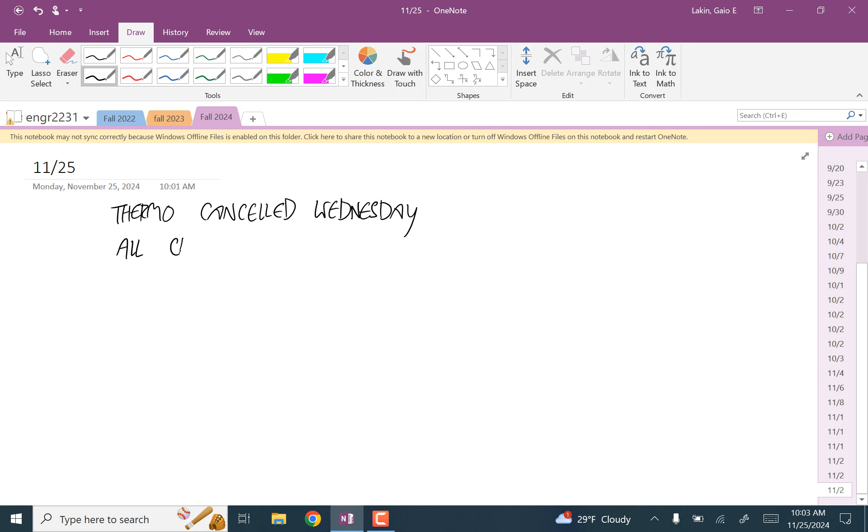Okay, but that's not what I meant to start by saying. The first thing is there's no class. My class on Wednesday is canceled, so Thermo is canceled Wednesday. All classes are canceled Thursday through the weekend.

I don't know about the status of the building. If you're going to drive in, you should find out about that. My guess is for sure on Thursday the building is closed, and I think it'll probably be closed Friday too.

And then the withdraw deadline - I'm not saying this for anybody in here right now, everybody in here is in good shape, but to get this on video, the withdraw deadline is this Wednesday. So after this Wednesday, that's not an option anymore.

Think about it. And if you're considering withdrawing from the class, it's a good idea to make an appointment with an advisor first, because it can have implications for financial aid and stuff. Some financial aid it matters for, some it doesn't. Just talk to somebody who knows about that stuff and make an appointment with an advisor.

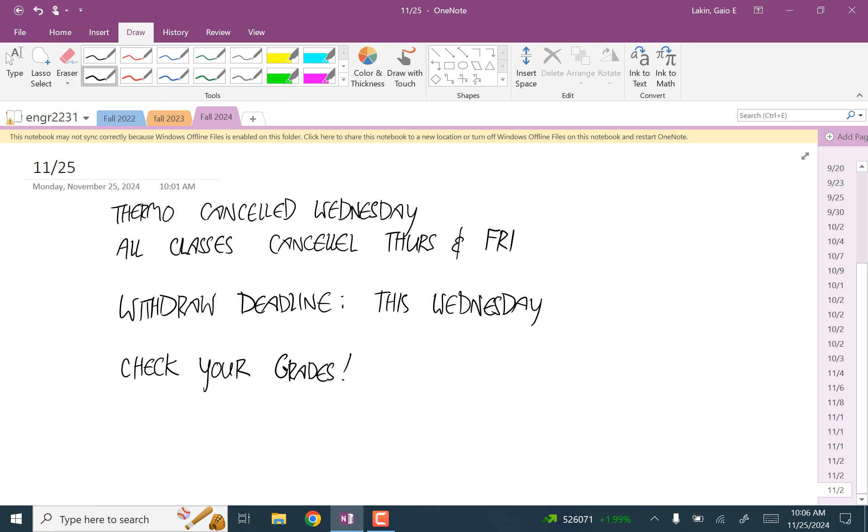All right, the next thing I want to do - I don't think I gave you any daily assignment, right? Okay, so I just want to do an example that's a lot like the daily problems you're going to be assigned. This is an example of using values with the Rankine cycle to calculate stuff.

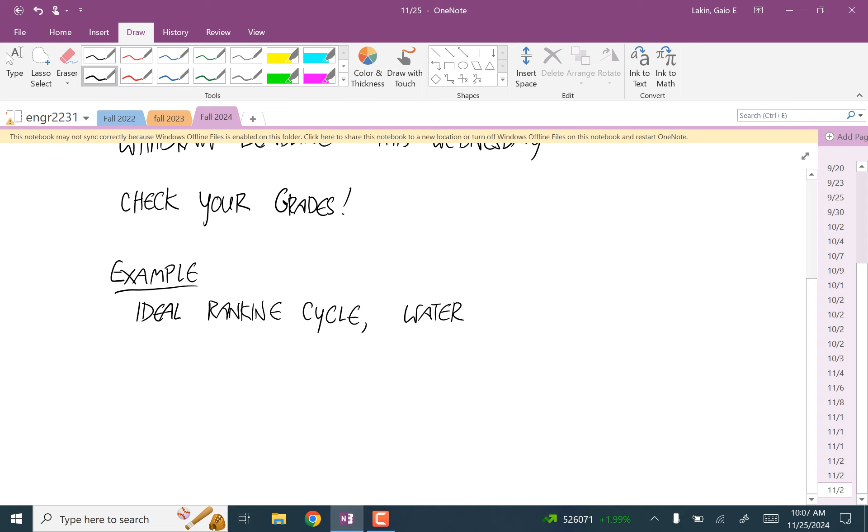The Rankine cycle that we've been dealing with so far has only been the ideal cycle, so this is an ideal Rankine cycle where water is the working fluid. We know that saturated vapor enters the turbine with a pressure of 8 megapascals, 8.0 MPa.

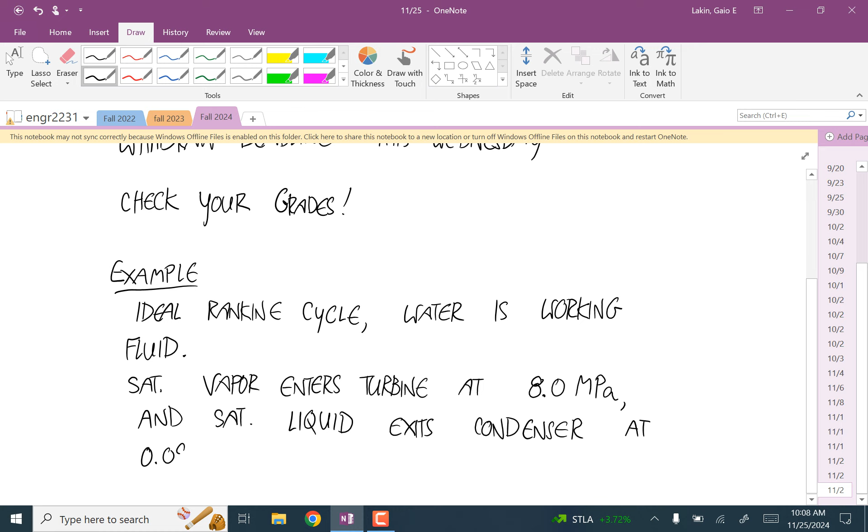And saturated liquid exits the condenser at 0.08 megapascals. And we're told that the net power of this plant, the net power output, is 100 megawatts.

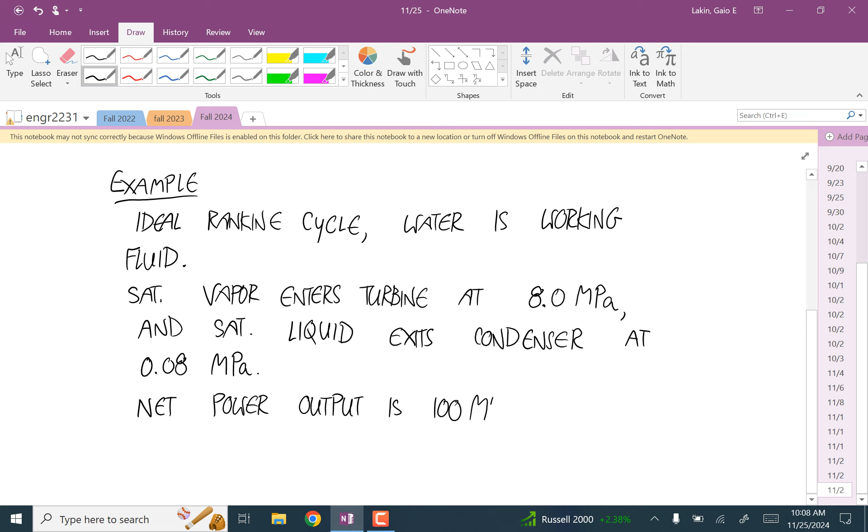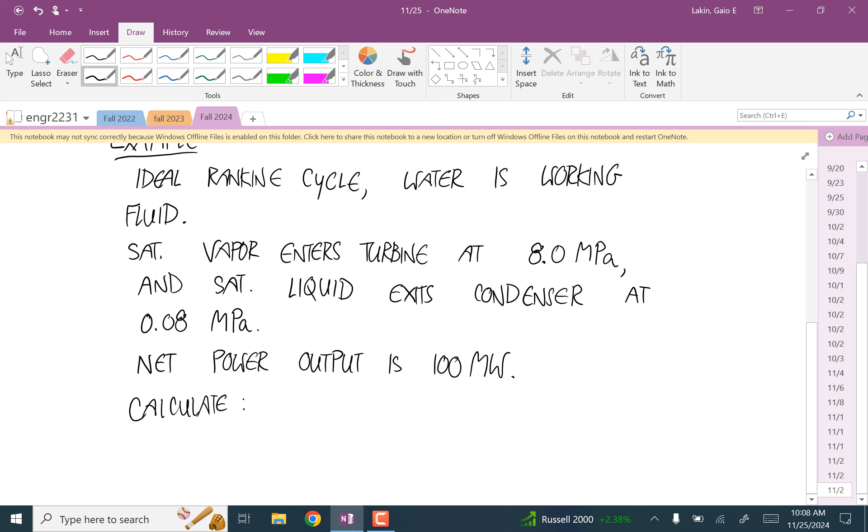And we want to calculate the efficiency and compare it to the ideal efficiency - oh, that doesn't make any sense, this is ideal, right? Yeah, very good. So we just want to calculate that efficiency, which is the ideal efficiency.

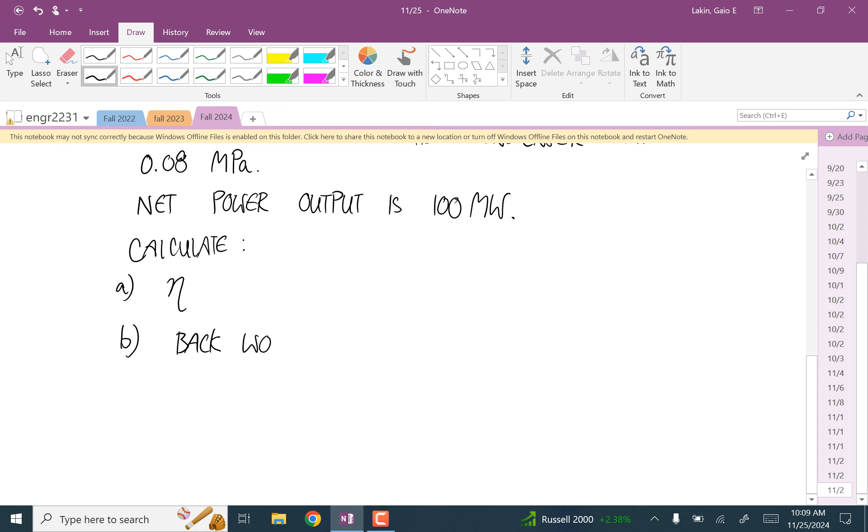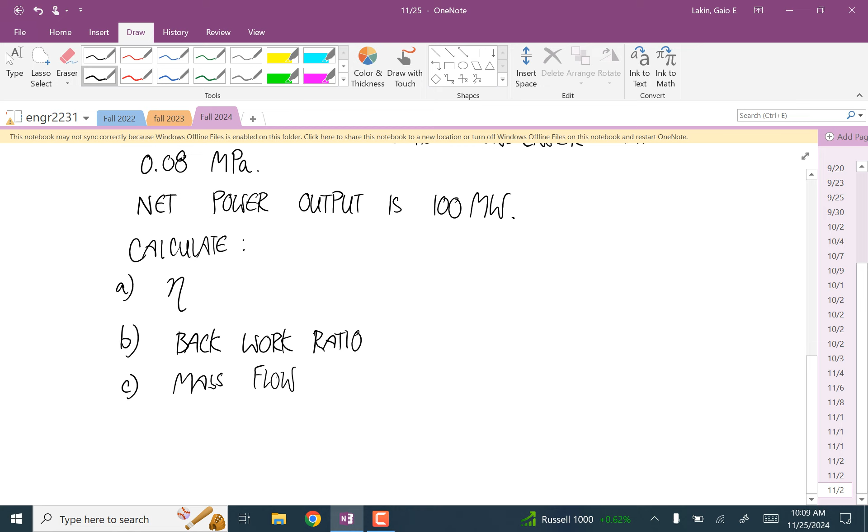We want to calculate the back work ratio. We want to calculate the mass flow rate. We want to calculate the heat transfer into the working fluid at the boiler, the heat transfer out of the working fluid at the condenser. And then last, I'll go into some detail about how to do this calculation because I haven't done this yet, but you'll see this in a problem or two.

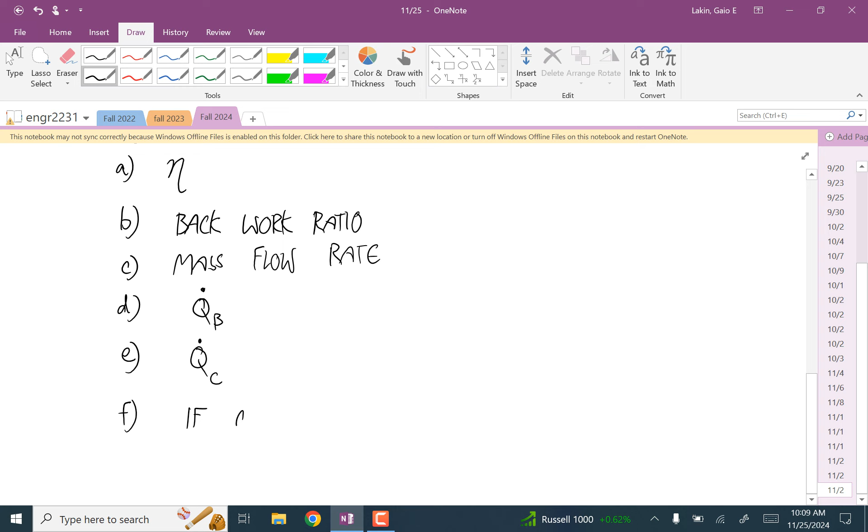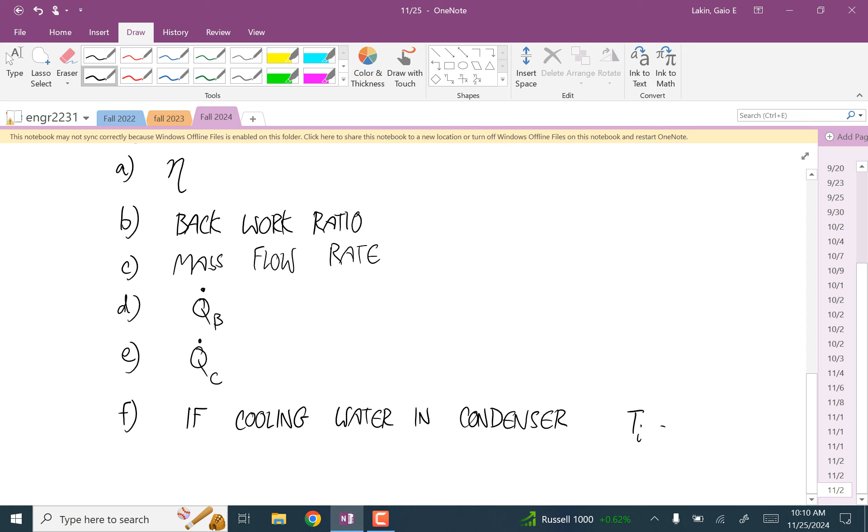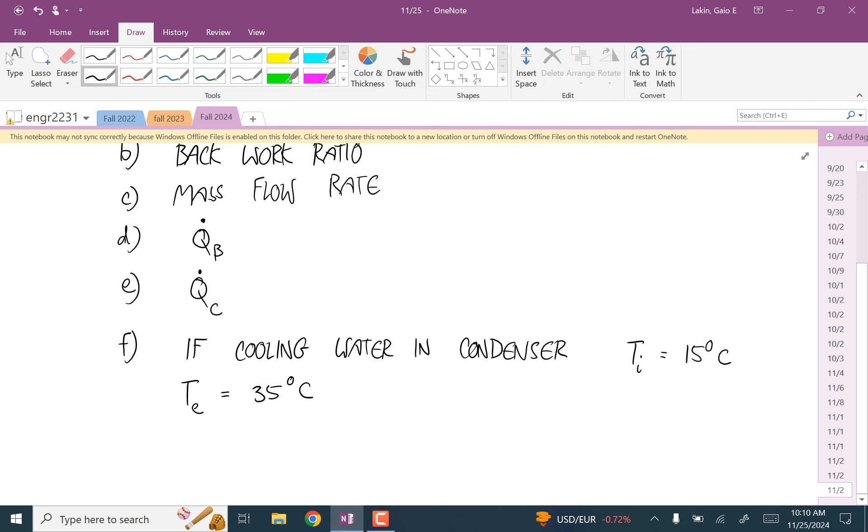If the cooling water in the condenser has an inlet temperature of 15 degrees Celsius and an exit temperature of 35 degrees Celsius - this is the water that's sent through the walls of the condenser to carry away the heat from the working fluid - the question is, what's the mass flow rate of the cooling water?

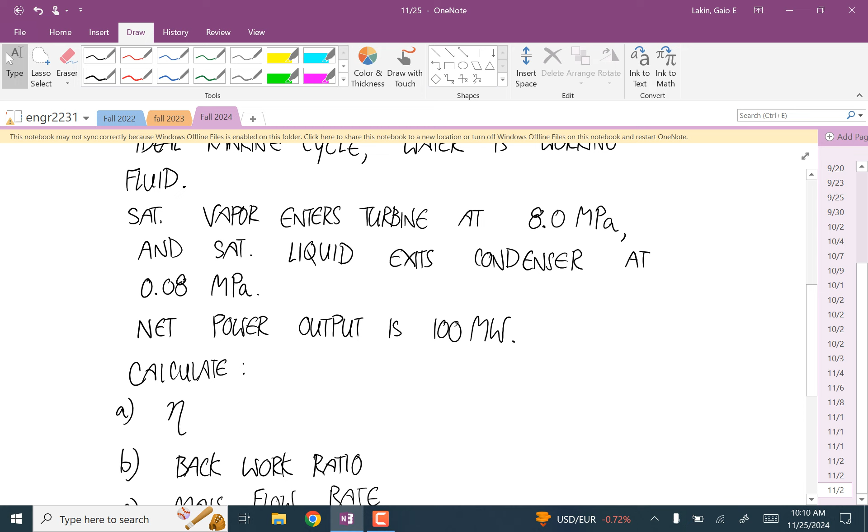The first thing I want you to notice about questions like this is you look at this thing with 4 different stages where we have all these enthalpies in our calculations, and you're like, there's no way that's enough information to calculate all this stuff. But remember that in the Rankine cycle, for every process, some property at the start is the same as at the end, because we have the 2 isentropic processes and the 2 isobaric processes. So if you can calculate one pressure, you can use that pressure in a different state, and if you can calculate one entropy, you can use that entropy in a different state.

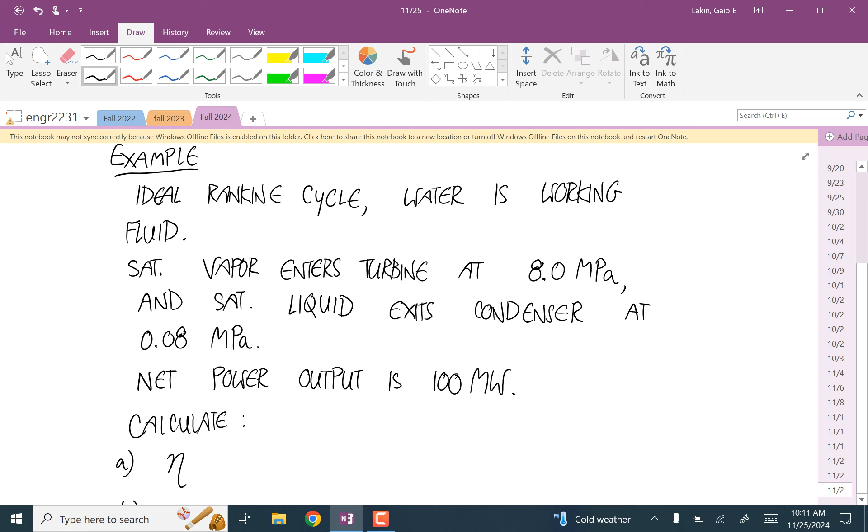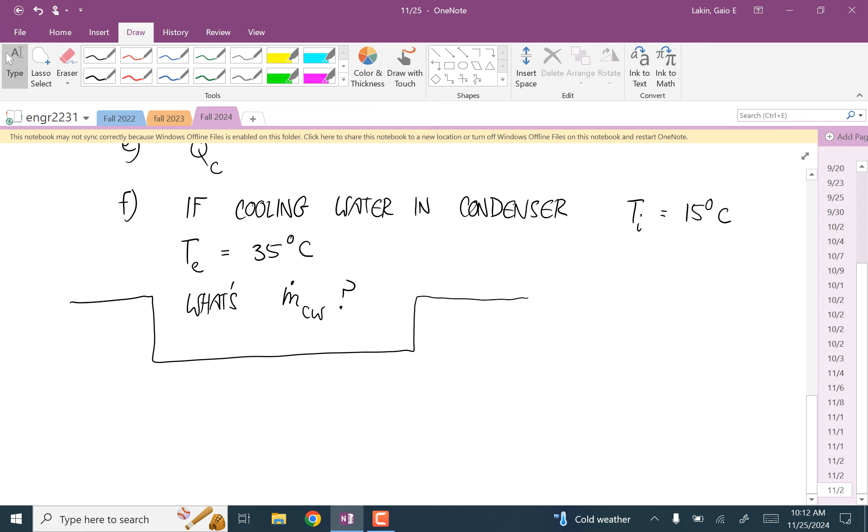Okay, so it always is going to look like you don't have enough information. But what we're going to do is just write down what we know, and we're going to start working our way around saying, okay, well, I know this is equal to this is equal to this. It's like one of those logic things in a standardized test.

I'm going to start by drawing the vapor dome in the temperature entropy diagram. Here's our state 1. Here's our state 2. State 3. State 4.

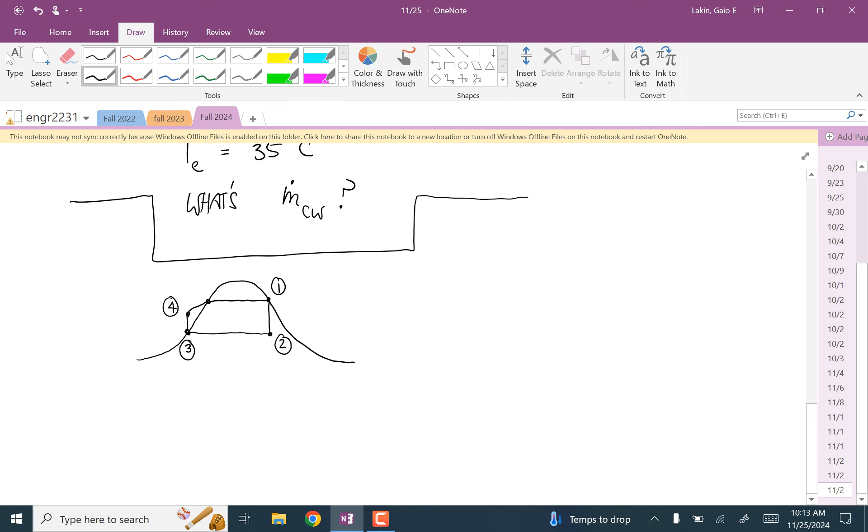Notice that for states 1 and 3, all we need to know is a single property in order to define every other property, because those are on saturation. At state 2, we also only need one property, but we would also have to know the quality, because this is a mixture. And for state 4, from the process from state 3 to state 4, we can assume that this is incompressible, because that's a liquid. It goes from being a saturated liquid to a compressed liquid. So those are all tools that we have available.

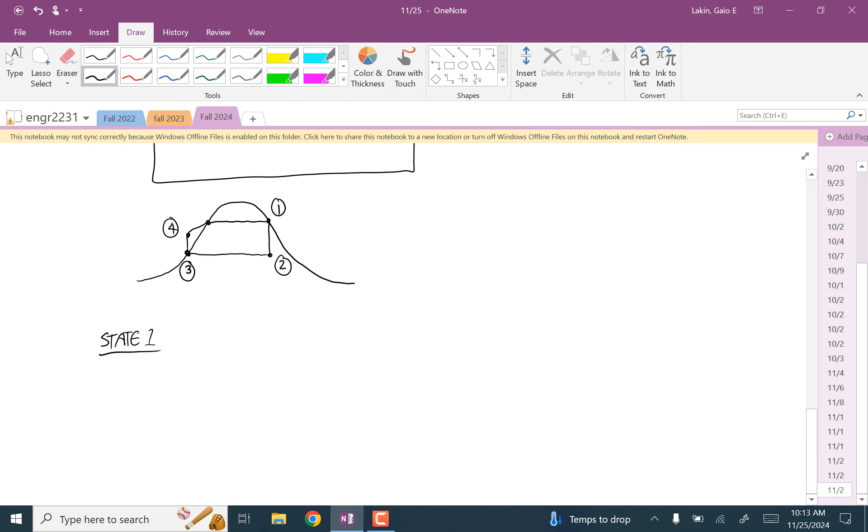All right, so I'm going to write out state 1, state 2, state 3, and state 4.

One to 2, what's that process? We can all agree it starts with iso, something. Isentropic, yes. That's the turbine. The two that are constant pressure are the ones where they're just heat exchangers. Think of it as a big room where you're putting this stuff in and you just have heated or cooled walls. So that's why it's constant pressure. So isentropic is the turbine and the pump. This is the turbine.

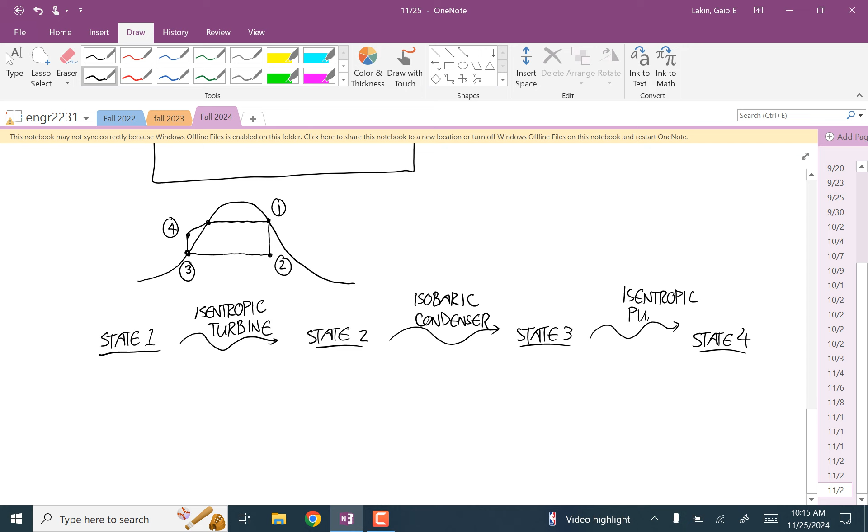2 to 3, what's that? That's the isobaric condenser. Yep, exactly. And then 3 to 4. Pump. Yep, isentropic pump. Boil it again. Yep, and then 4 goes back to the other side, and this is the isobaric boiler.

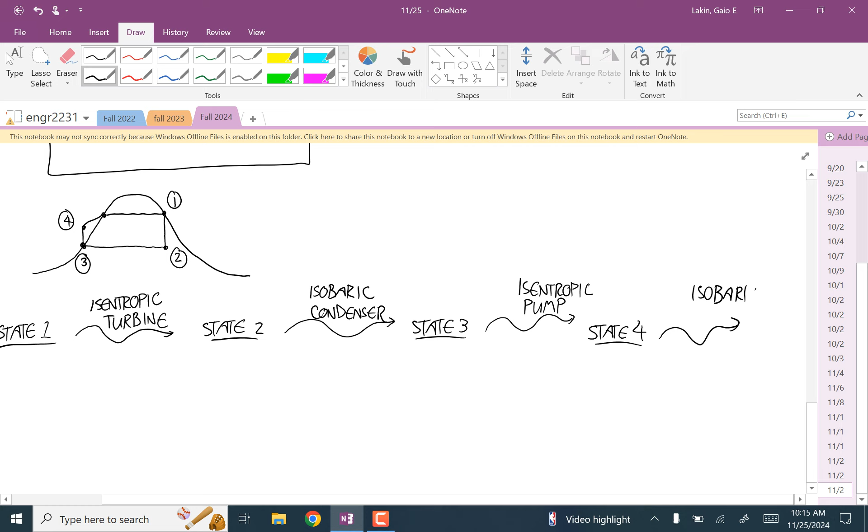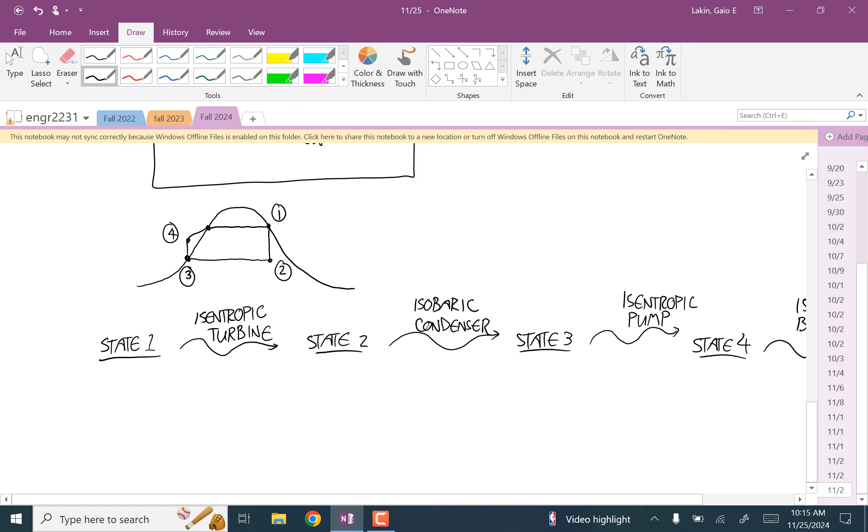Okay, so we know that state 1 and state 2 have the same entropy. Doesn't the pressure change though? It changes going from 3 to 4, but it doesn't change from 4 to 4. Oh, 4 to 1, no, it doesn't change. It's the same pressure — think of it as just one big room. The pump is just dumping stuff into this room, so the pressure of everything is the same inside this room.

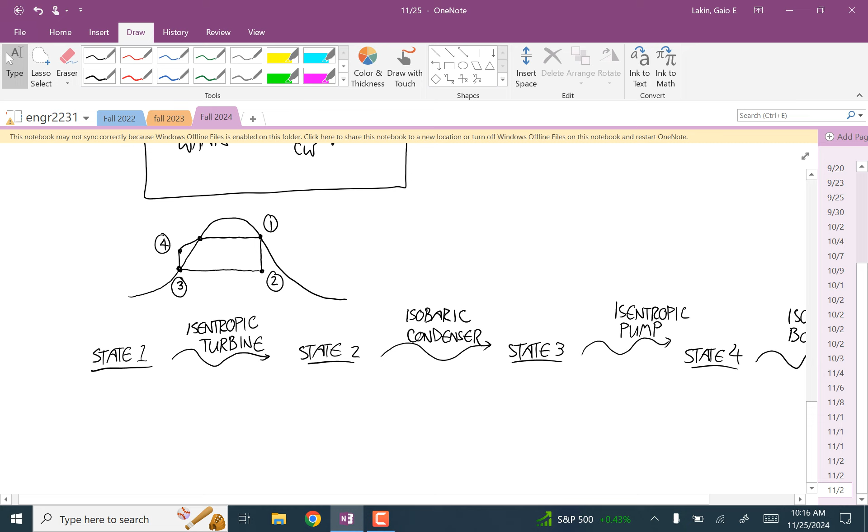Is it because it's a liquid? Not necessarily, because the condenser has vapor in it. It's just because it's all in contact with each other, so the pressure is just always equilibrating in both of those two cases.

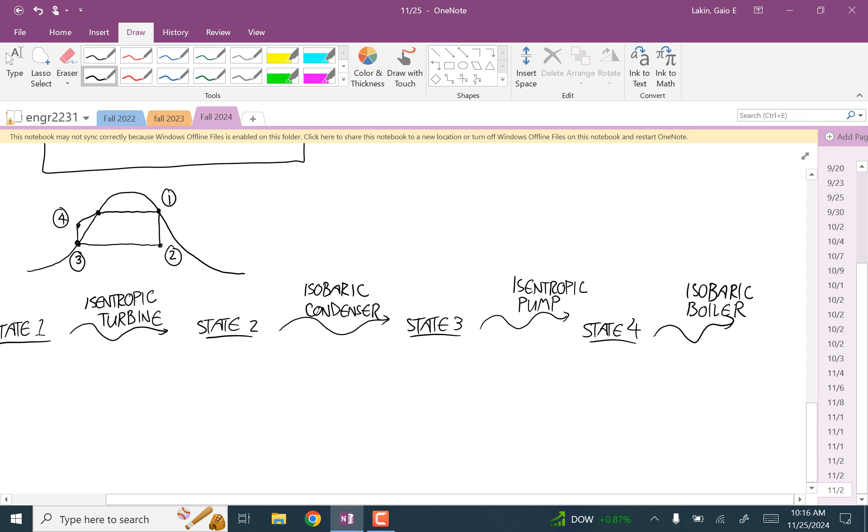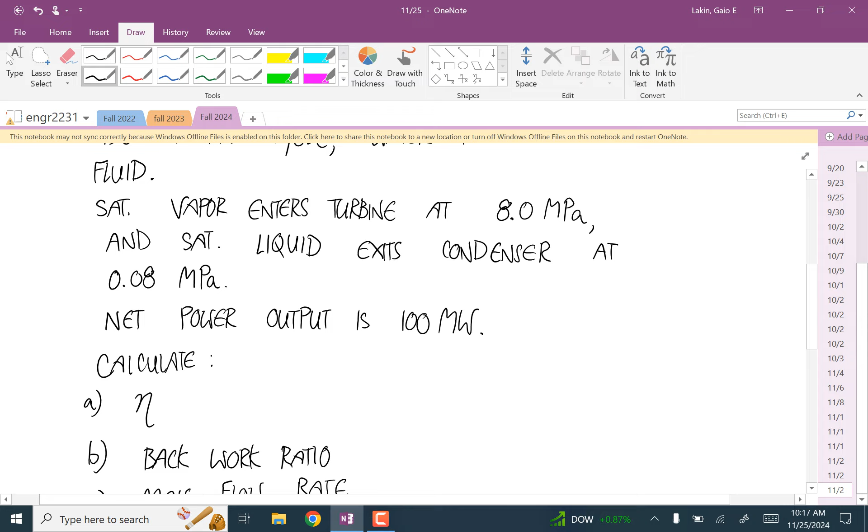All right, so state 1, we know that it's a saturated vapor. We're given that P1 is 8 megapascals. It tells us that explicitly. And since we know the pressure and it's a saturated vapor, we can use a table. So that tells us that S1 is known. We can look that up.

I'll just look it up right now. So this is 5.7432 times 10 to the third, in SI units. And the other thing is, in order to calculate the efficiency, what we really want are those enthalpies. If we have those 4 enthalpies, we can calculate the efficiency. So H1 is 2758 times 10 to the third, also in SI units.

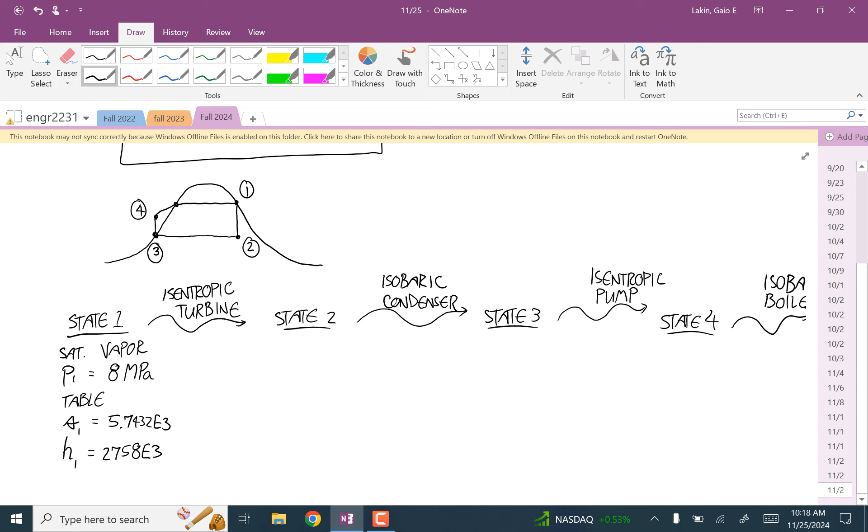So now look at the two states adjacent to this and think about what we know. It's isobaric from state 4 to state 1, so we know that the pressure at 4 is 8 megapascals. And it's isentropic from state 1 to state 2, so we know that the entropy at state 2 is 5.7432 times 10 to the third.

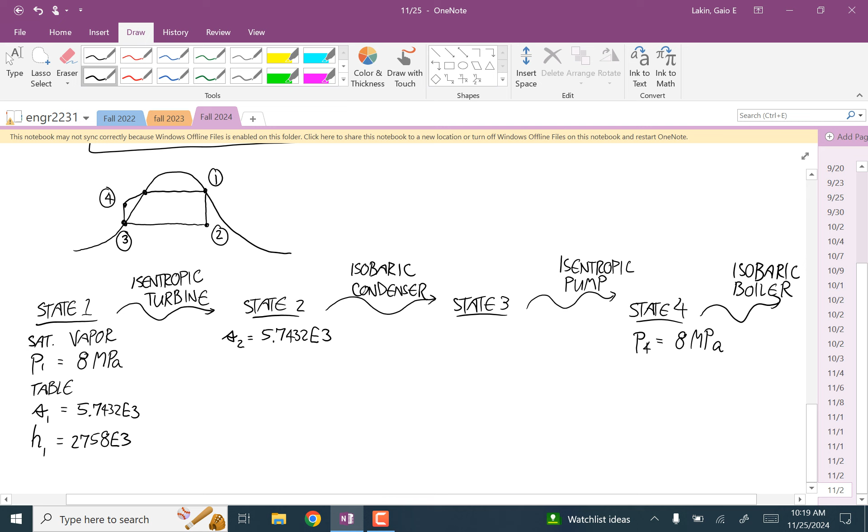So we haven't thought too much about anything. We saw that we could look up anything we wanted at state 1, and then we put in the stuff that we know is the same as state 1. So now let's look at the other information we're given.

We're told that saturated liquid comes out of the condenser at 0.08 megapascals. Which state is that? State 3. Yeah, so state 3, we know the pressure. I'm going to write this as a saturated liquid. P3 is 0.08 megapascals. So that means we can look everything up.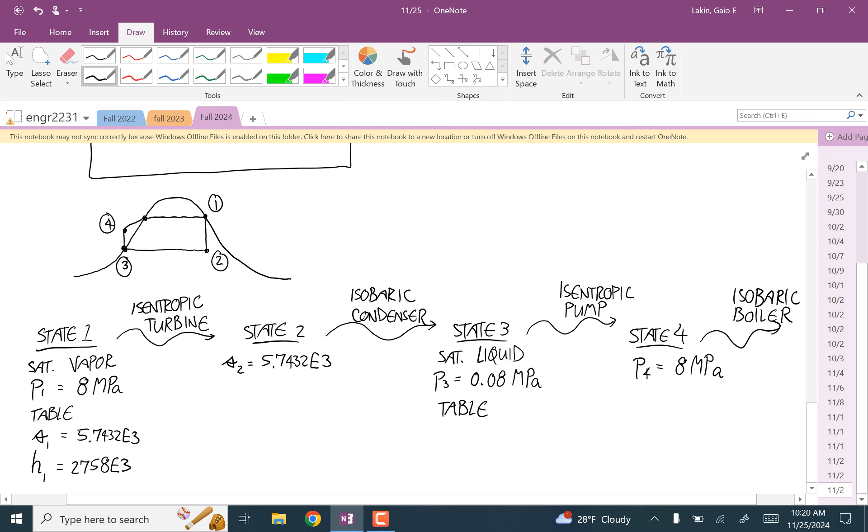And so here we'll get the entropy and the pressure again. So H3 is 173.88 times 10 to the third in SI units. And where did I put the entropy?

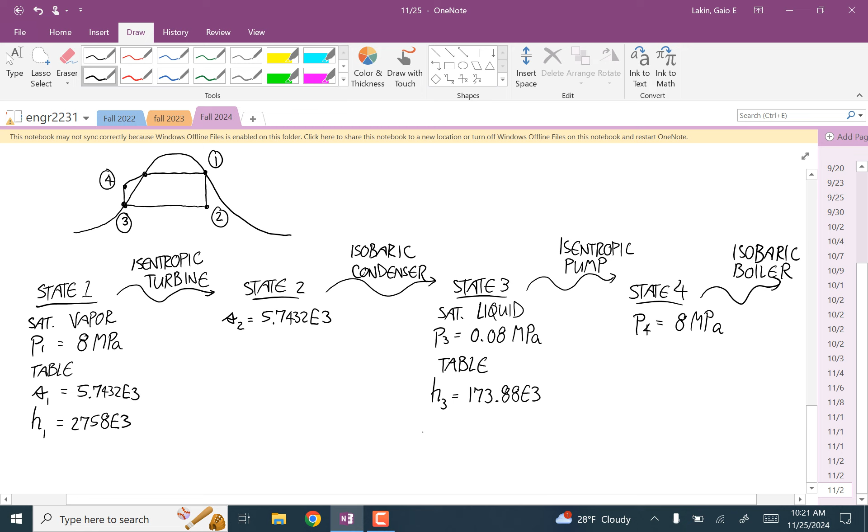I guess I didn't even look that up, so I guess we can calculate. We're just going to use the incompressible assumption instead. But I could have just as easily looked that up, I just don't have the table sitting in front of me.

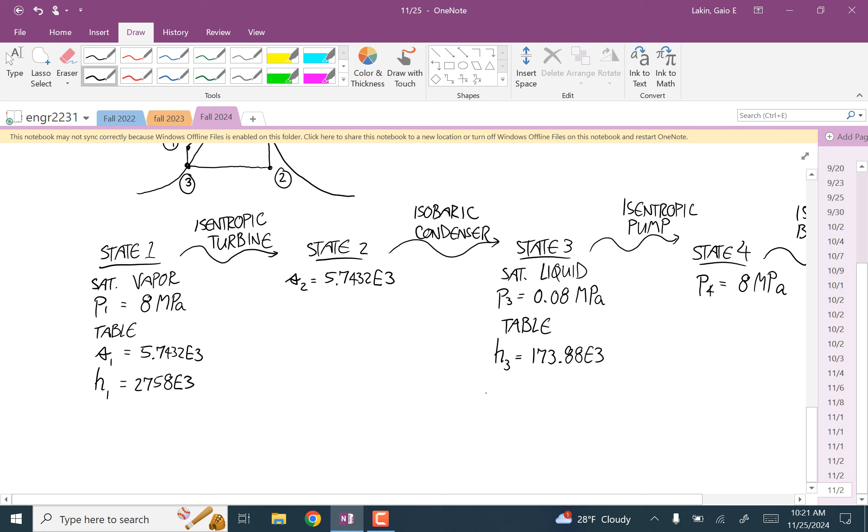So what do we know based on this? We could know the entropy in state 4, but I didn't look it up here. So instead, the only thing we know is that the pressure at state 2, because this is an isobaric process, is 0.08 megapascals.

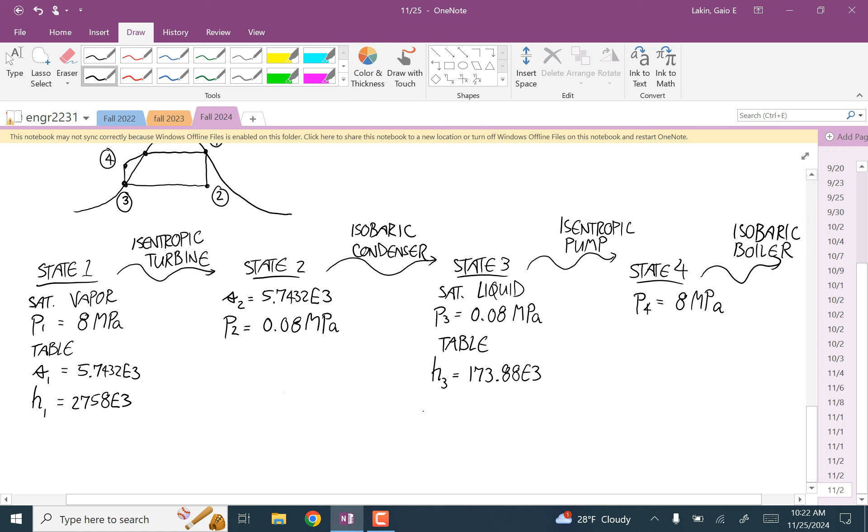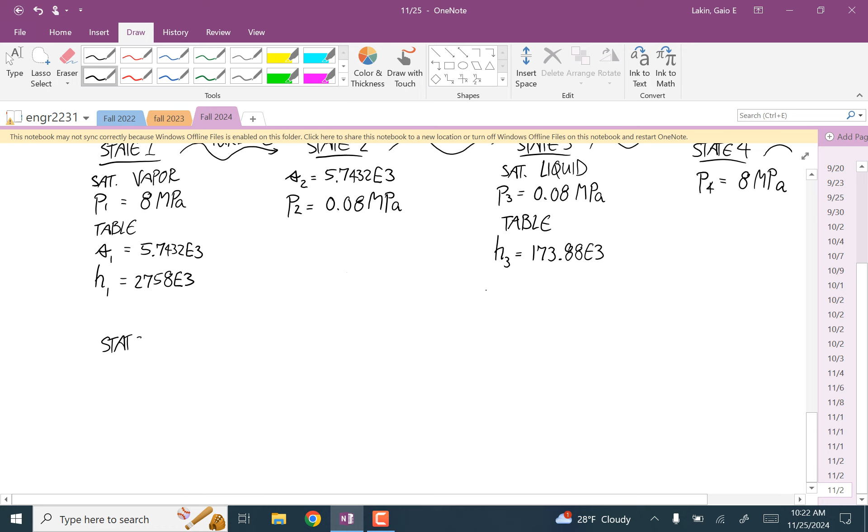Okay, so state 2, our goal is to get all of these H's. We can calculate the quality at state 2, because we know that this is in saturation, it's inside the vapor dome.

And so we can look up S for the liquid is 0.5926 times 10 to the third. And the specific entropy for the gas is 8.2287 times 10 to the third.

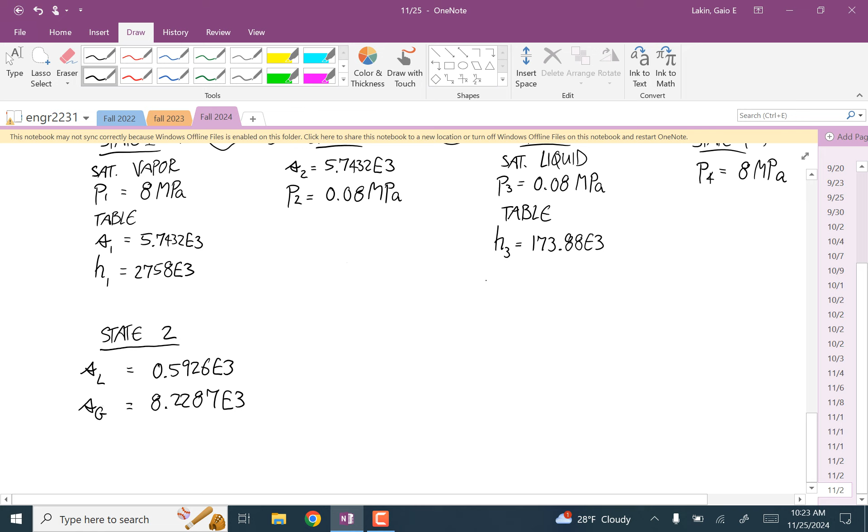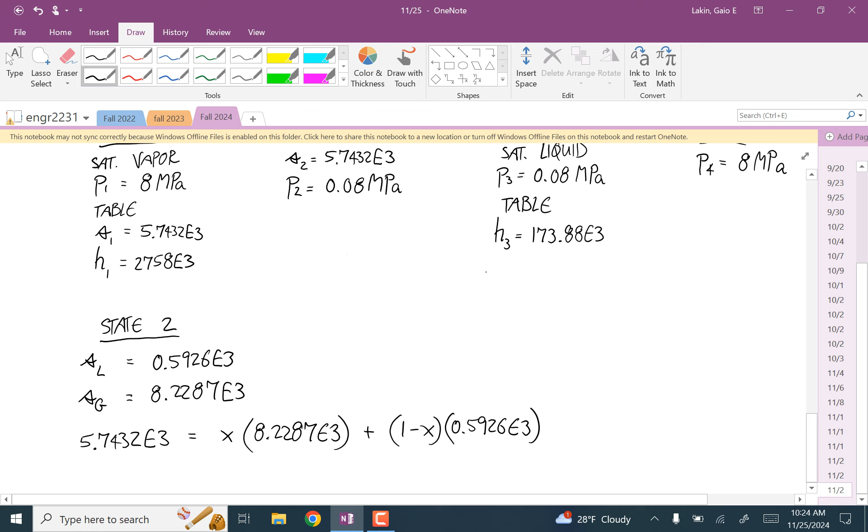And we know the actual entropy. So now we can say 5.7432 times 10 to the third is equal to x times 8.2287 times 10 to the third plus 1 minus x times 0.5926 times 10 to the third. And that lets us calculate that quality.

So the quality here is 0.6745. That's the only state where the quality matters. Because state 2, if you just keep referring back to this temperature entropy diagram and see what state you're in, the only one where quality is a thing is at state 2. But why does it help now to have the quality at state 2?

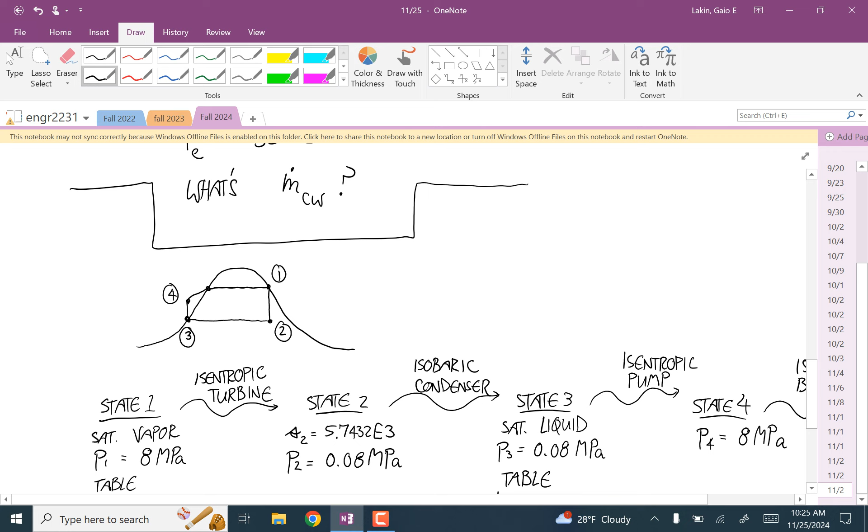So we can figure out what the enthalpy is. Exactly. So we can look up now the liquid enthalpy is 173.88 times 10 to the third. The gas enthalpy is 2577 times 10 to the third. And now we can say that the enthalpy at state 2 is...

0.6745 times 2577 times 10 to the third plus 1 minus 0.6745, which is 0.3255, times 173.88 times 10 to the third. And you get a specific enthalpy at state 2 of 1795 times 10 to the third.

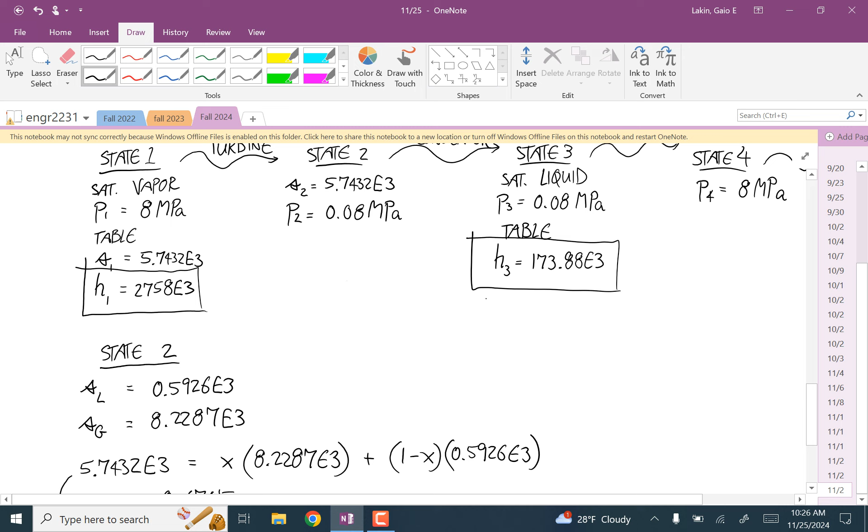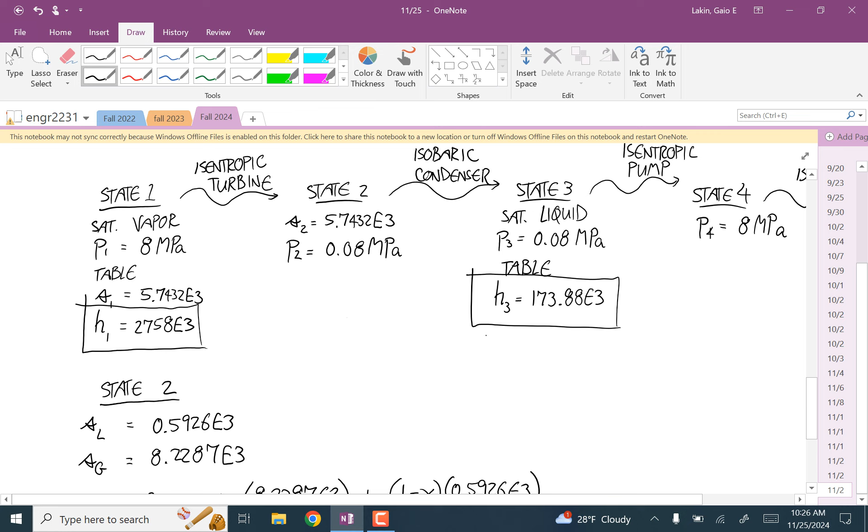Okay, so our goal is to get all these enthalpies. I'm just going to start putting boxes around the ones we know. So we know enthalpy at states 1, 2, and 3. And now we're going to use the incompressible assumption.

Remember, I could have just looked this value up, but if I give you the values in a question, if I don't tell you it's water or whatever, I just give you values, you should be comfortable doing it either one of those two ways. So we're going to go for incompressible from state 3 to state 4.

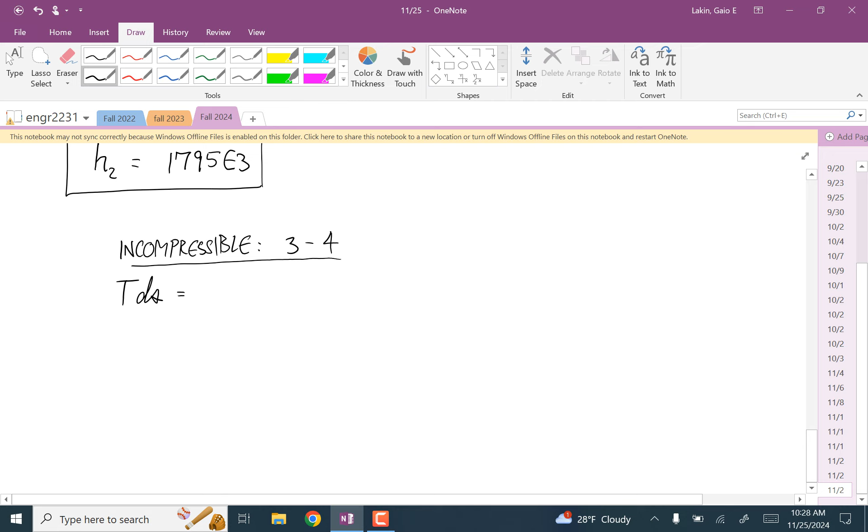And the incompressible thing that we learned last time was, 3 to 4 is isentropic. I have to think about this for a second. We started with the TDS equations, and it was dH minus V dP. And it's isentropic, so this is 0.

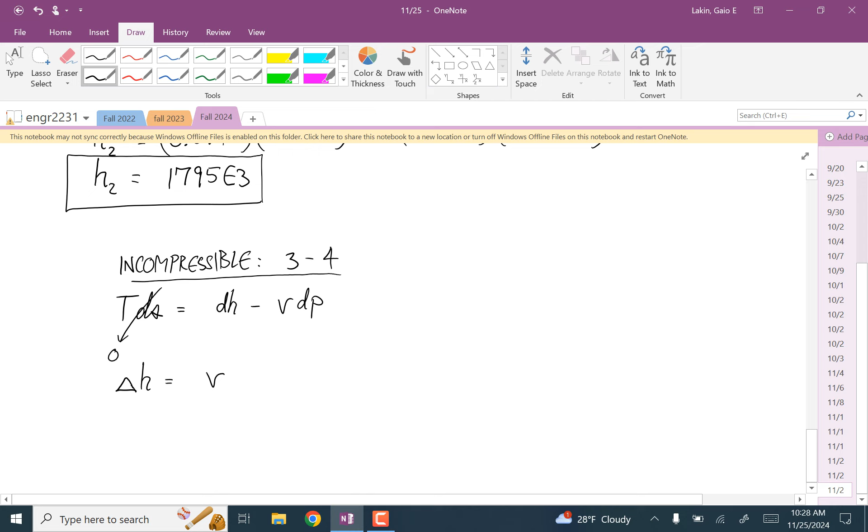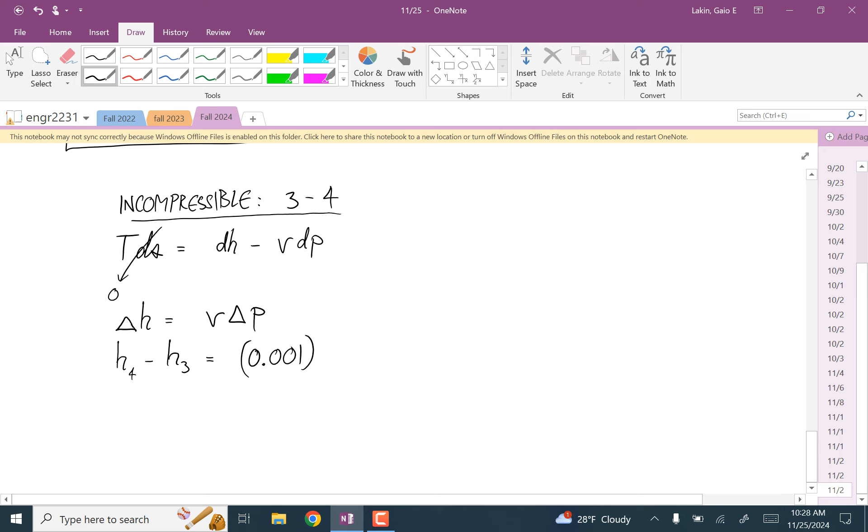So we had that the change in H was equal to, since that V is constant, this is equal to V times the change in P. And so we have H4 minus H3 is equal to the specific volume of water, which is always right around 0.001 in SI units, times the change in pressure, pressure 4 minus pressure 3.

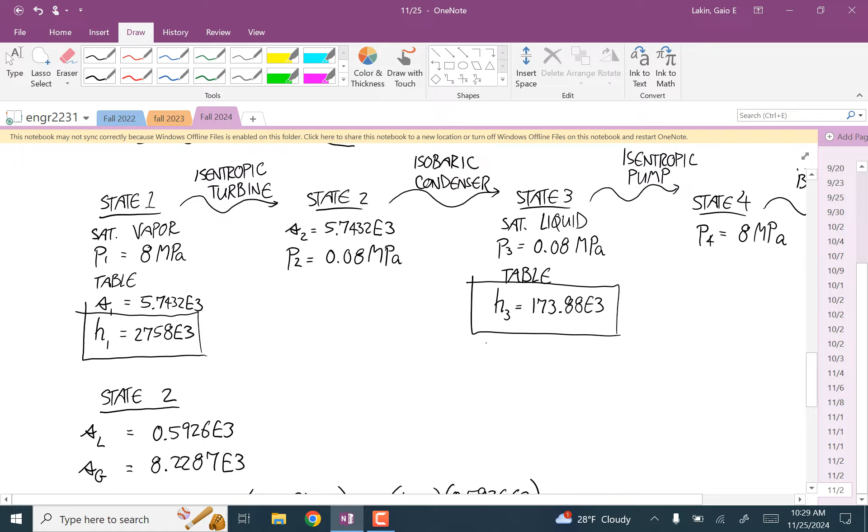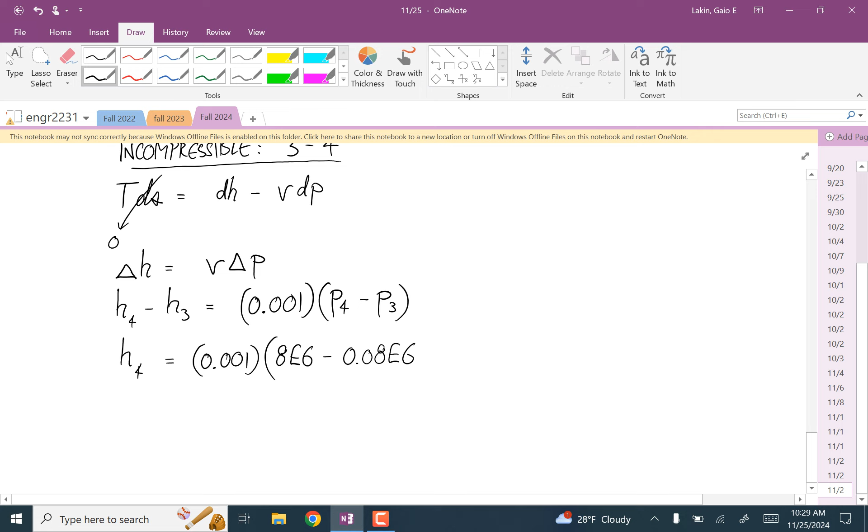The pressure at 4 is 8 megapascals, pressure at 3 is 0.08 megapascals. We are trying to calculate H4. So H4 is equal to 0.001 times 8 times 10 to the 6 minus 0.08 times 10 to the 6, plus H3, 173.88 times 10 to the third. And so you get H4 is equal to 181,800 in SI units.

And in these problems, once you have all 4 of those enthalpies, you can really just go into these problems, calculate the enthalpies, and not even read the problems until you get these. Once you have these 4, you can just sort of bounce around answering the questions, usually.

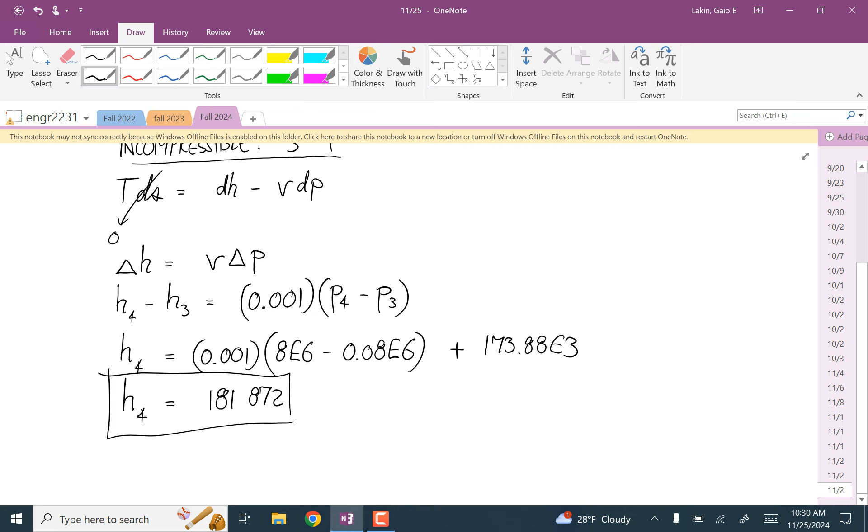Okay, so now that we have those 4, our part A is what's the efficiency? That's 1 minus the quantity H2 minus H3 over H1 minus H4. And so all you're doing is plugging in these values.

1795 times 10 to the third minus 174 times 10 to the third, divided by 2758 times 10 to the third minus 182 times 10 to the third. And you get an efficiency of 0.371. So 37% efficiency.

That's pretty low for an ideal efficiency. It looks pretty low, but we're going to get values around there under 50% most of the time.

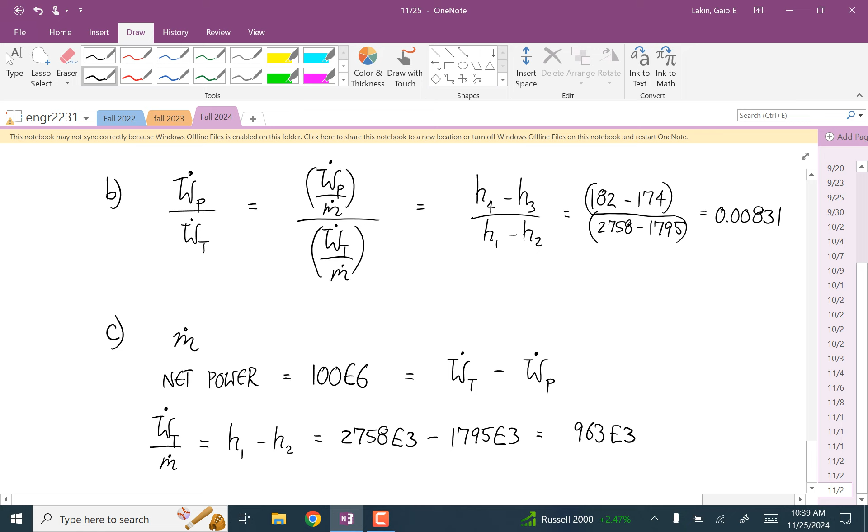Did you not just use the equation from the WP over... I did just use that, yeah. Oh yeah, yeah, I just hadn't calculated the denominator before.

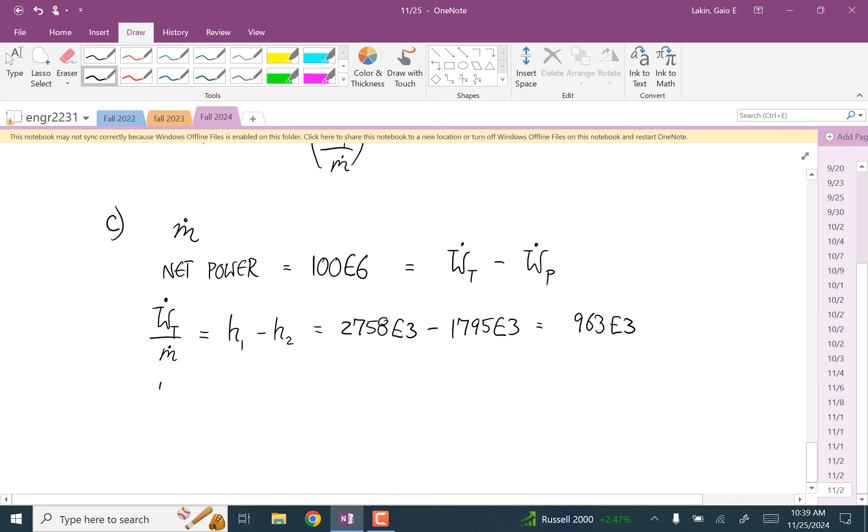And then same thing with the pump, though. Yeah, we're just using the numerator now from part B. So this is H4 minus H3, and this is over M dot. So 181,872 minus 173,880, and so this is 7.99 times 10 to the third in SI units.

And so WT dot over M dot minus WP dot over M dot is 963 times 10 to the third minus 7.99 times 10 to the third. So you get 955.01 times 10 to the third.

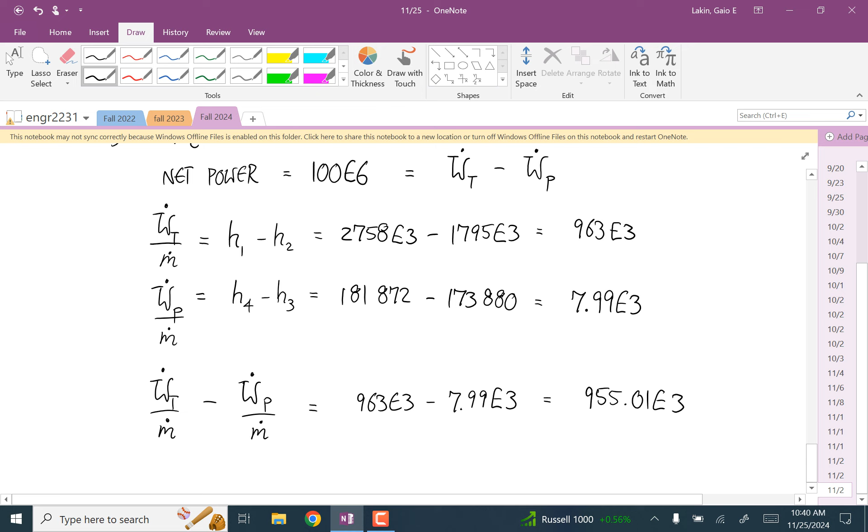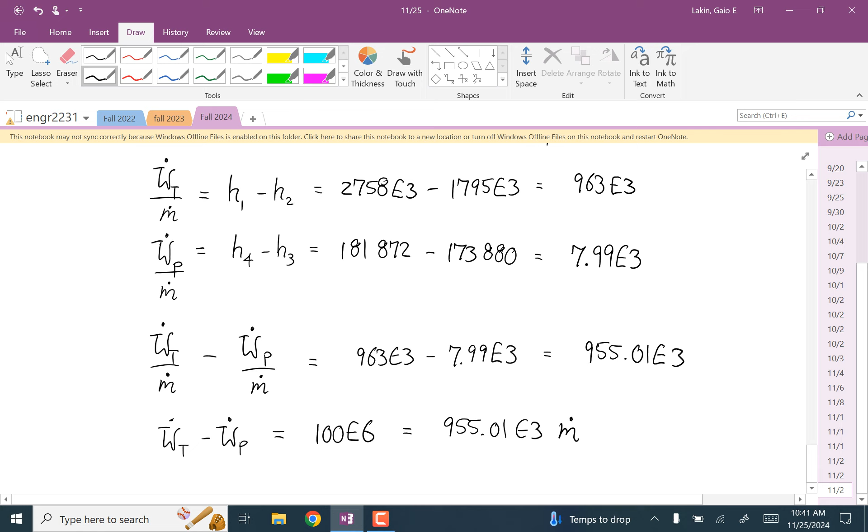And so multiply both sides by M dot and you get WT dot minus WP dot, which is equal to 100 times 10 to the 6th. That's the wattage value that we're given, is equal to 955.01 times 10 to the third times M dot. And so there's only one mass flow rate that can have all the values that we got so far, and that is 104.7 kilograms per second.

Any questions about that?

Now we're trying to find, this was C. Now we're trying to find the heat transfer rate at the boiler and the heat transfer rate at the condenser, from the equation I gave you yesterday in your notes. Q dot at the boiler divided by M dot is equal to H1 minus H4. We know all these enthalpies, so subtract those and you get 2.576 times 10 to the 6.

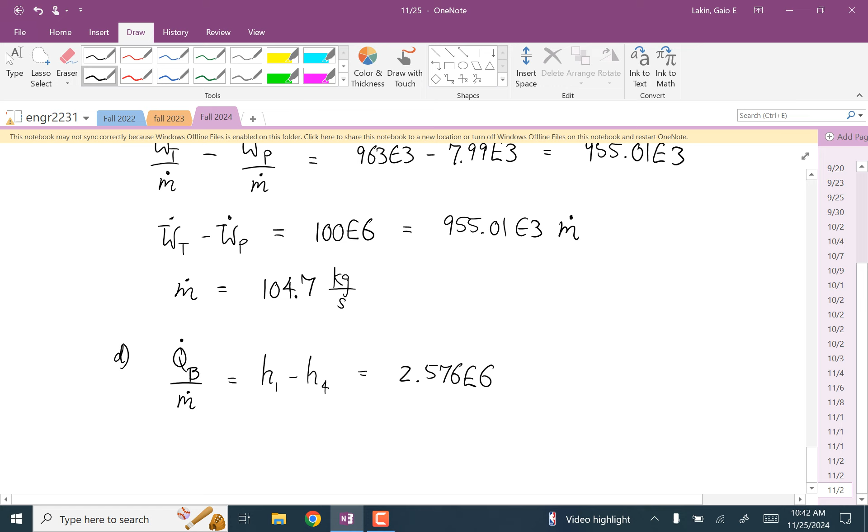And so now Q dot at the boiler is just M dot times Q dot at the boiler divided by M dot. So that's 104.7 times 2.576 times 10 to the 6. So we get a heat transfer of 2.70 times 10 to the 8th. This is in watts.

And do the same exact thing for the condenser. QC dot over M dot is H2 minus H3, which is 1795 times 10 to the 3rd minus 173.88 times 10 to the 3rd. And then QC dot is just whatever that is times M dot. So you get 1.70 times 10 to the 8th watts.

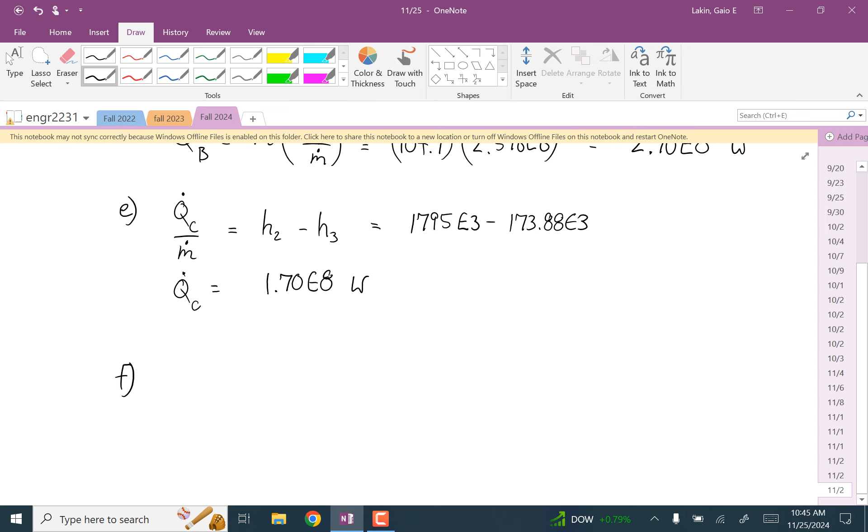Okay, so all of these, as soon as we had the 4 enthalpies, we could just go around and do all these. The one calculation that's different is F. And this is the one where we're trying to calculate the mass flow rate of the cooling water. And so here's how to think about what's happening at the condenser.

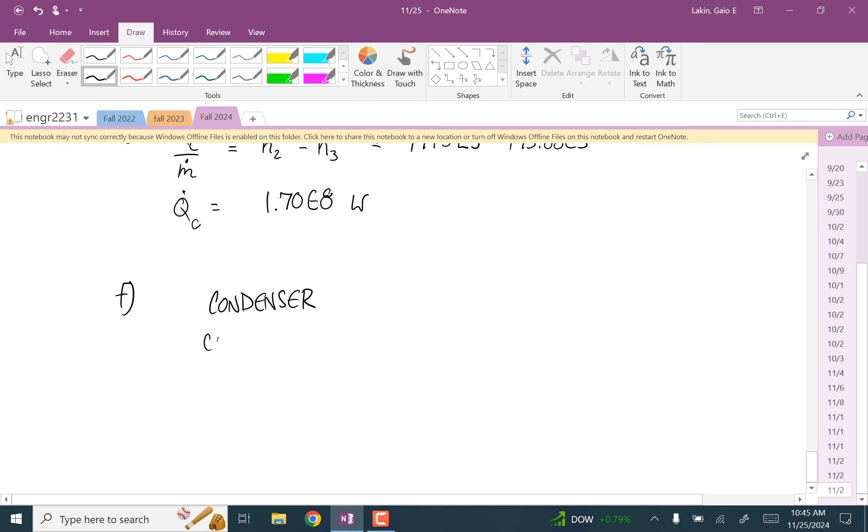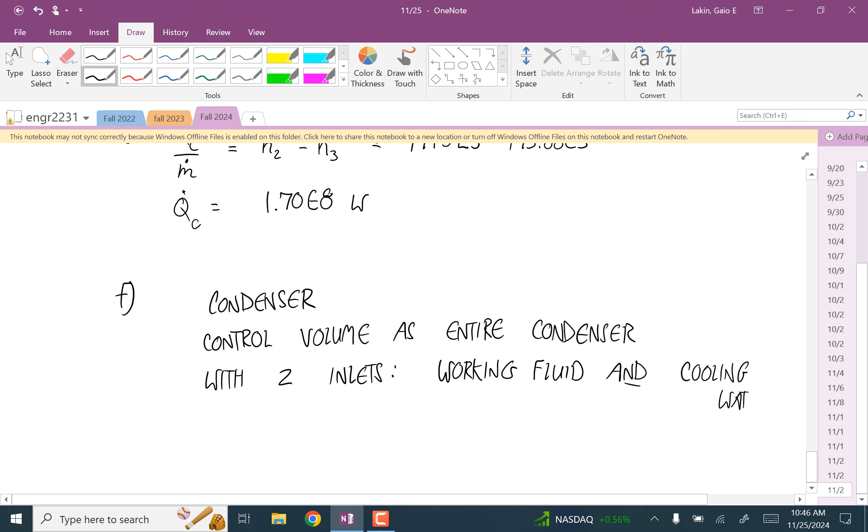We're going to think about the control volume as the entire condenser with 2 inlets. Those inlets are the working fluid coming into the condenser and the cooling water coming into the condenser. And 2 exits, the same 2 things. So those are the working fluid and the cooling water.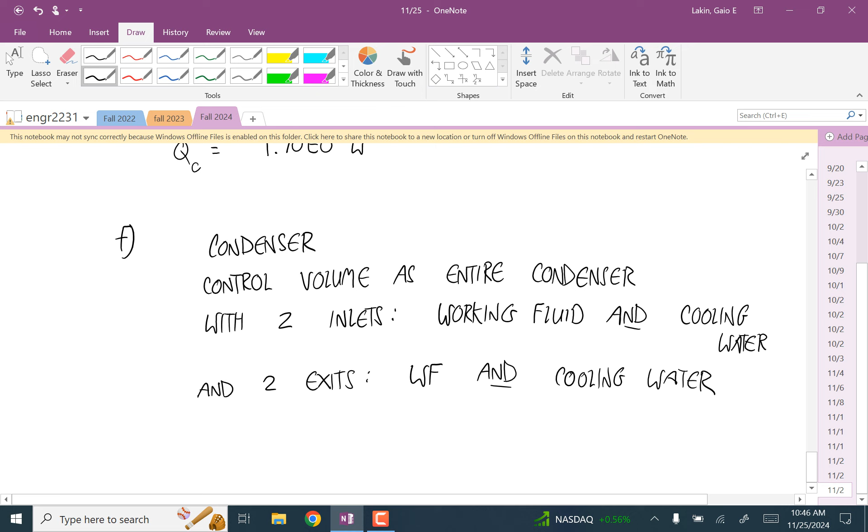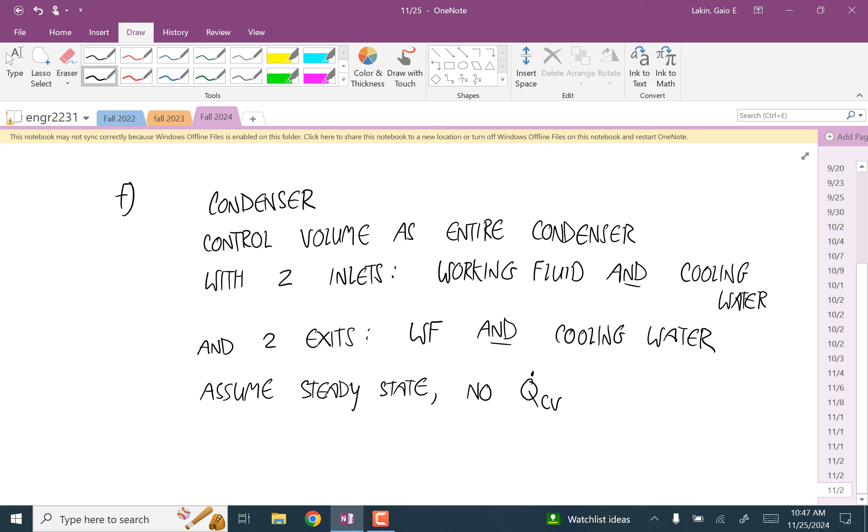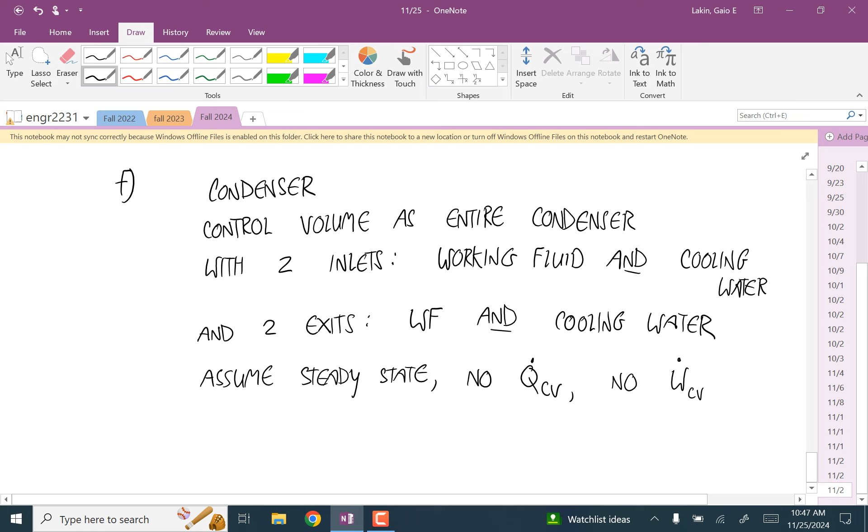And we're going to assume that it's steady state. We're going to assume that there's no heat transfer. That seems funny when you first think about it. So we're going to assume there's no heat transfer for the control volume. But remember, all we're doing is assuming that the only place heat can go is from one of these fluids to the other one, and that's what the cooling water is for. So now that we're considering the control volume to also include the cooling water, we're saying that there's no heat transfer outside of our system. And no W dot, and as usual, no change in kinetic energy effects or potential energy effects.

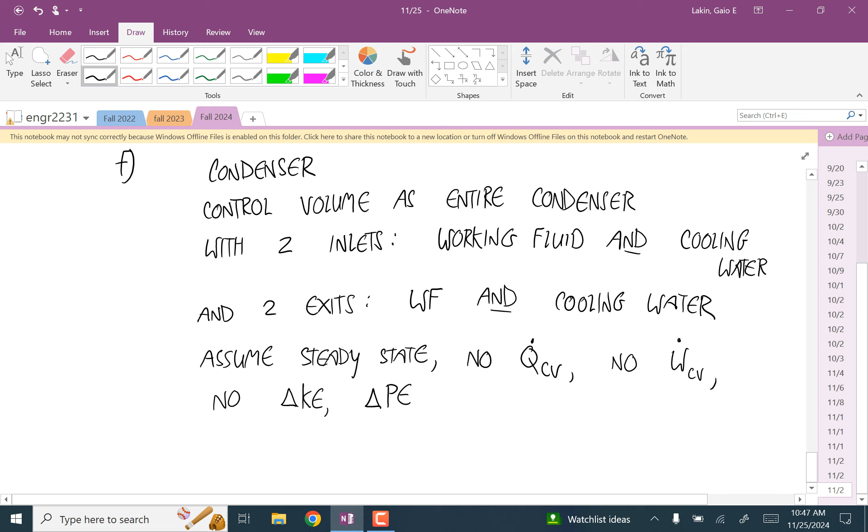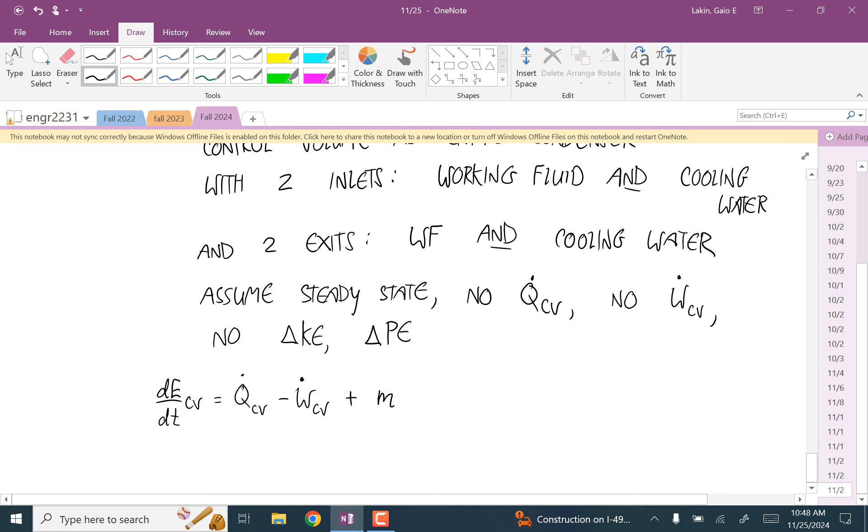Okay, so we'll write out the full first law for control volumes. dE dt is equal to Q dot minus W dot plus the mass flow rate of, you can think of it as the working fluid, times H of the working fluid. I'll just go dot, dot, dot, because this stuff's all going to cancel. I'm sorry, let's make this the inlet working fluid, and this also has to be inlet working fluid. Plus Mi cooling water times Hi cooling water plus dot, dot, dot.

And then the exit, so minus M dot E for the working fluid times He for the working fluid plus dot, dot, dot, minus Me for the cooling water times He for the cooling water plus dot, dot, dot. And all this stuff cancels. Everything cancels in here except the enthalpies.

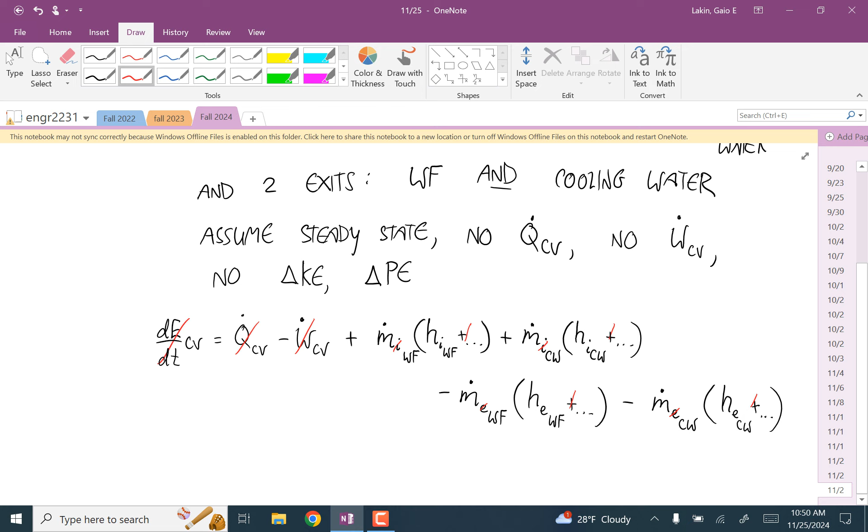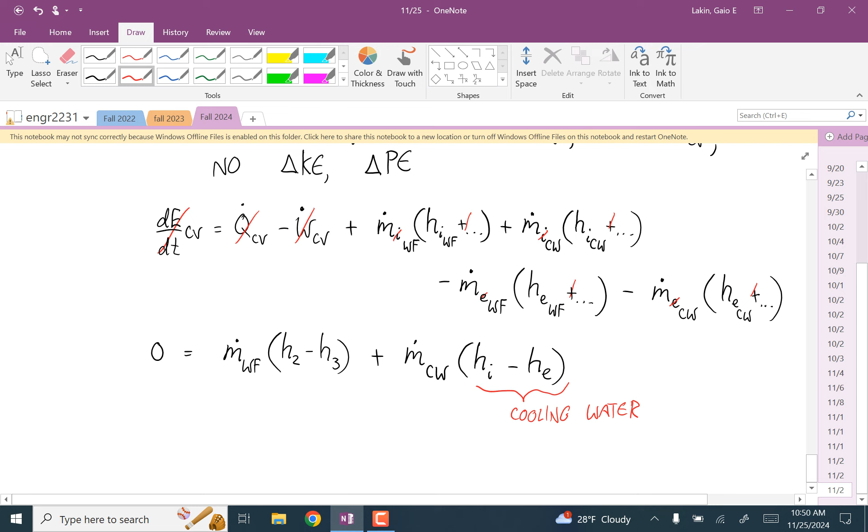We're going to assume that the inlets and exits are the same, so we just have one mass flow rate for the working fluid and one mass flow rate for the cooling water. And all this just comes out to say 0 is equal to the mass flow rate for the working fluid times the quantity H2 minus H3, plus the mass flow rate of the cooling water times the quantity H inlet minus H exit. And this is for the cooling water. And this is incompressible with constant pressure. That's just because it's water, we're making that assumption, just because it's a liquid, any liquid.

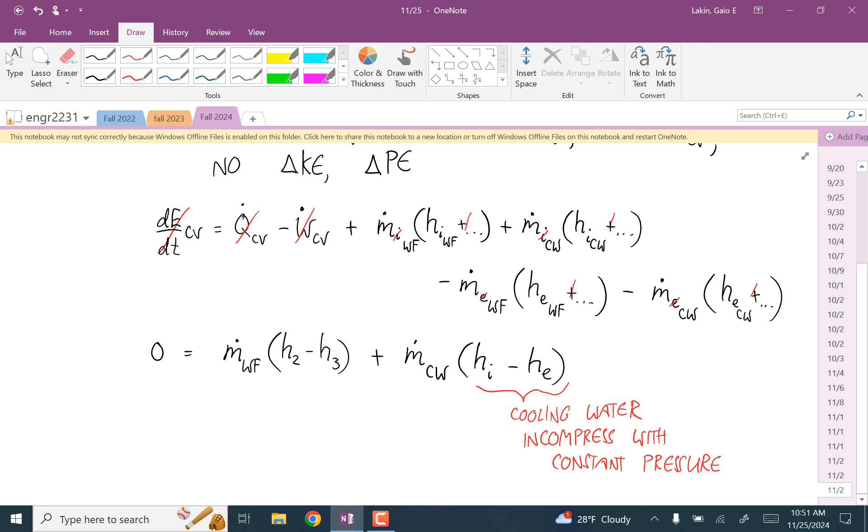And so with these assumptions, we can say, so all of this stuff we can calculate from before. So 0 is equal to 104.7 times H2 minus H3. So H2 minus H3 is 1.62 times 10 to the 6, plus the mass flow rate of the cooling water times this difference in enthalpies.

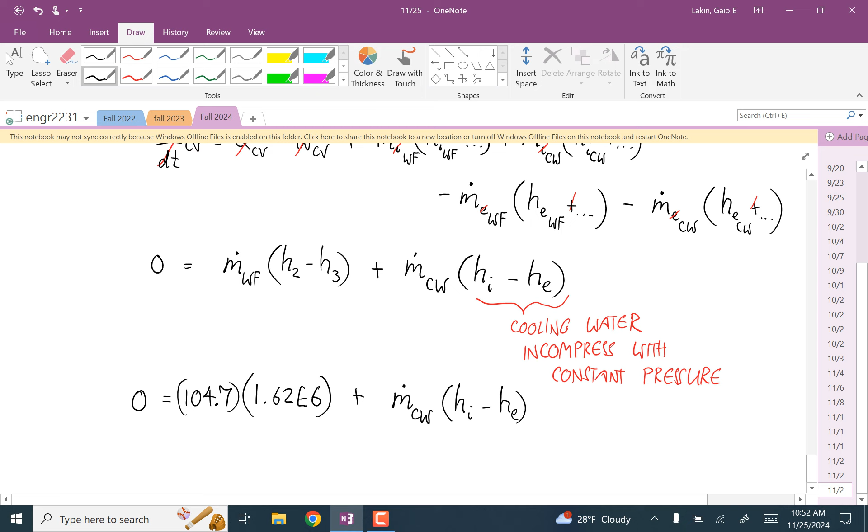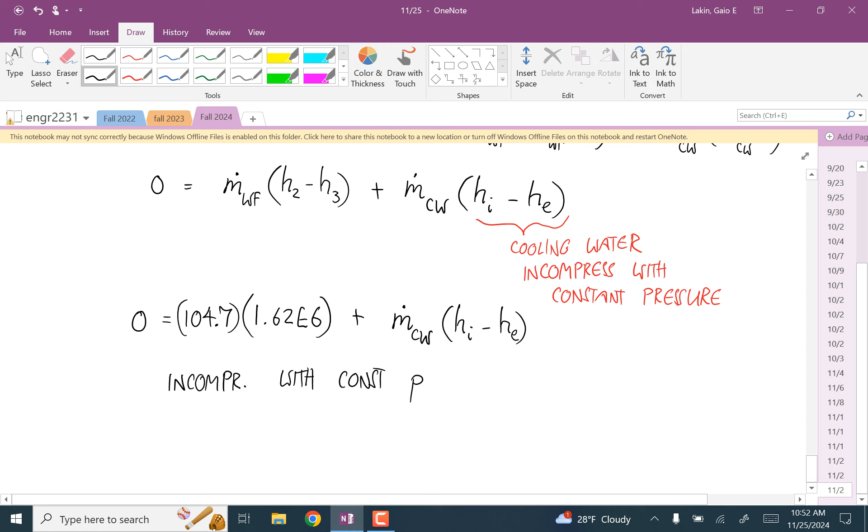And now we're going to use incompressibility of this and constant pressure to calculate this change in enthalpies. So since it's incompressible with constant pressure, the change in specific enthalpy is just equal to C times the change in temperatures. That's because neither the pressure nor the specific volume change. And so C, this is 4186 for water.

So we have 4186. We were given a final temperature. Well, we were given a starting temperature of 15 degrees Celsius, an exit temperature of the cooling water of 35.

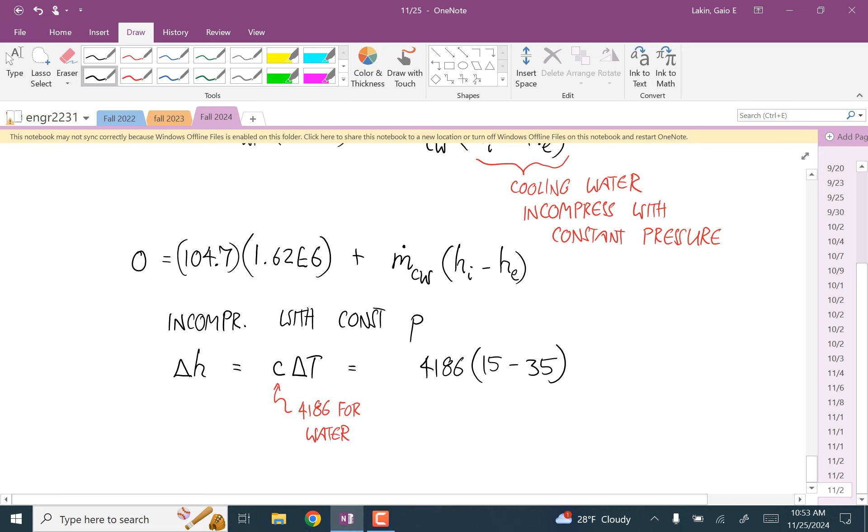And so 0 is equal to 1.70 times 10 to the 8 plus the mass flow rate of the cooling water times 83,720.

And so this should be negative. And so the mass flow rate of the cooling water is 2,030.58 kilograms per second.

That's 20 times as much mass flow rate for that water that's cooling the working fluid than the working fluid itself. Could you think of that as like the exhaust? Yeah, think of that as like the coolant going in your radiator to remove heat from the engine. The only job of that cooling water is to take heat away from the working fluid as it goes through that condenser.